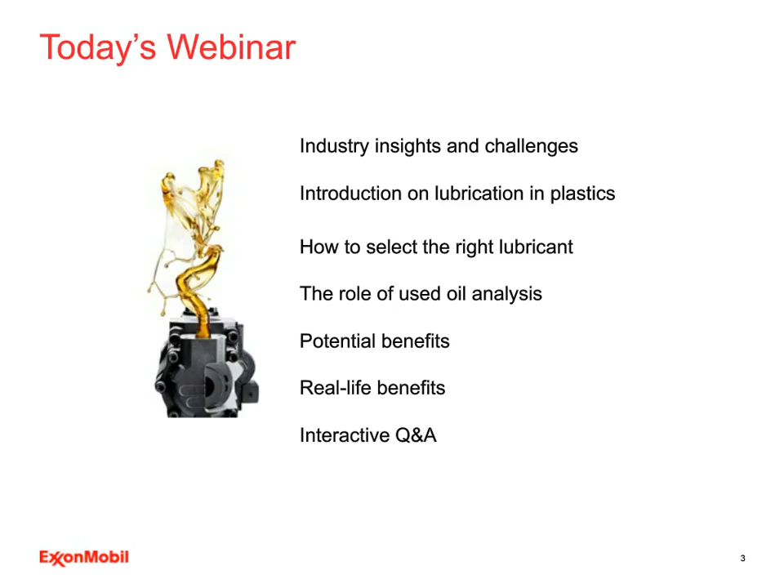So, Rakesh. Hello, everyone. Thanks, David, for that short introduction. So before we move on to the technical aspects of correct lubrication on a plastics plant, I'd like to highlight and put some scale to the plastics industry in Europe today.

So this is an industry that employs just over 1.45 million people today, with approximately 60,000 entities operating across the sector. And that's anything from polymer production to the processing of finished goods, all the way through to the distribution of those goods, the majority of which are small to medium-sized enterprises. With a 320 billion euro turnover, it's one of the largest manufacturing contributors in the EU region, and it's growing, in particular in the packaging subsector.

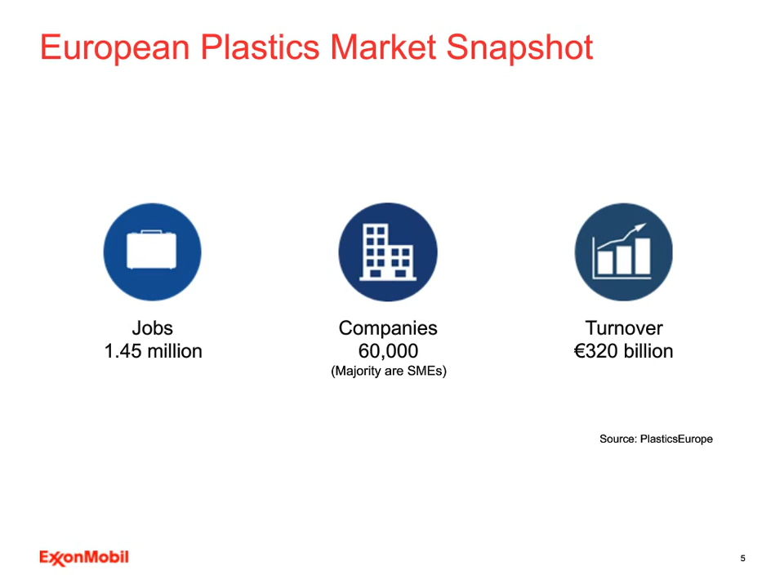So this is certainly an industry that we at Mobil are interested in today. When we were planning the webinar, what we wanted to do was first understand what the industry is challenged by today. And to do this, I thank our partner, Plastics News Europe, who have helped us to conduct an industry insight survey with a cross-section of plastics professionals who are involved in the manufacturing process of finished plastics goods.

The first question we asked our respondents: what's the most important factor when selecting new equipment? So 46% of our respondents told us that the latest technology was the most important factor when selecting their equipment. This was followed by 25% that selected equipment based on energy efficiency. For us, these are unsurprising results, as we know the industry is moving towards higher automation, wider machines, better designs, and we also appreciate that the latest technology and energy efficiency always do inherently go hand in hand.

And today we see newer plastics machines embracing that efficiency metric. We also see a lot of new machines that are coming fitted with newer energy measurement instrumentation as well as data loggers. So this is clearly an important area to look at.

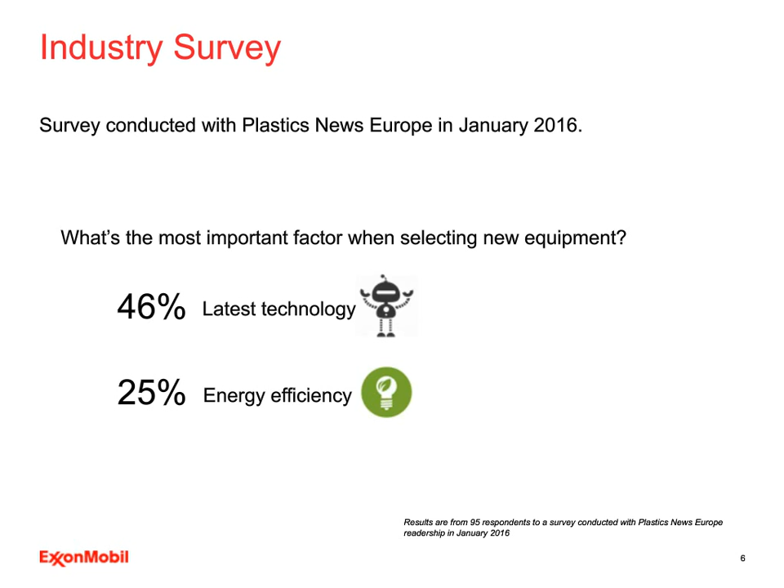When it came to lubricant selection, we asked these two questions together: what's the most important consideration when choosing a lubricant, and what is the most important benefit of using the right lubricant?

Half the respondents indicated that original equipment manufacturer approvals, as well as their recommendations, influence their choice. That's certainly something we appreciate in the lubricants business. ExxonMobil today has more than 6,000 approvals for our entire product slate, and our dedicated team of equipment builder engineers work very closely with the key plastics machine makers across the globe, right through from their design stage to development to the operational stage.

39% indicated price of the lubricant as an important factor. Price will always be an important factor, but alongside this result, it's worth mentioning that the same people indicated that 41% said productivity gains were the biggest benefit of choosing the right lubricant, closely followed by energy efficiency increases at 25%.

This tells us the industry is ultimately looking to lower their total cost of ownership around their equipment, and that can be anything from reducing filtration costs, improving cycle times and units produced, reducing filter and valve replacements, or even reducing the kilowatt-hour input into their pumps, and waste oil reduction. It's a very vast area, and it's great to see the industry is looking to lower that total cost of ownership.

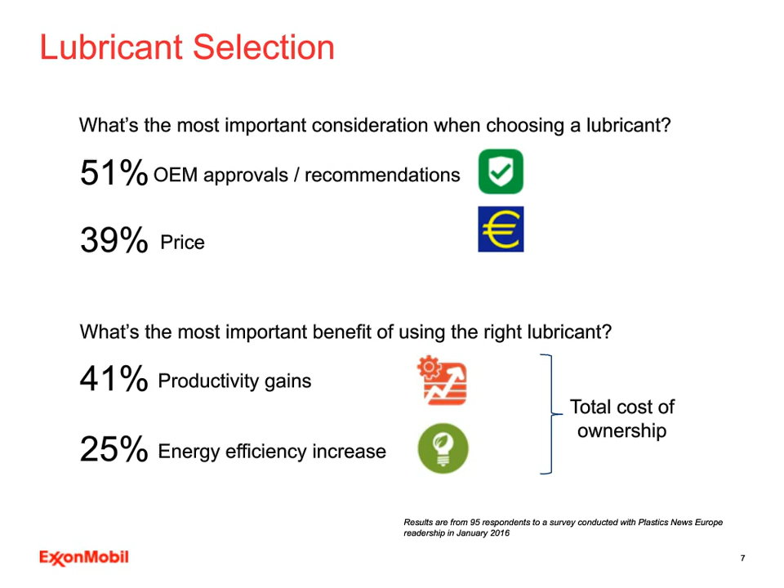For us, these are staggering results, and they really do act as the main premise behind the next section of this webinar, and hopefully we'll be able to address how proper lubrication can mitigate against these very costly pain points that plastics processors are experiencing today. So I'll pass you back to David, who would like to now throw a question out to the audience.

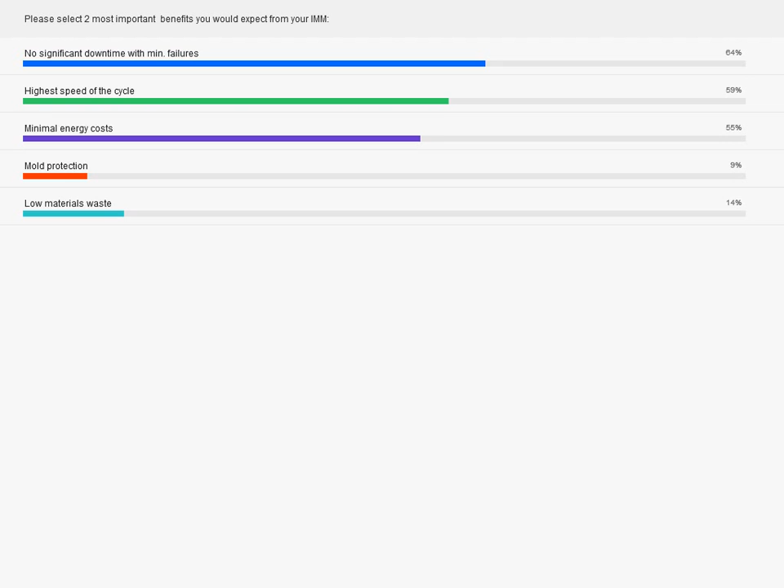Any comments from Rakesh or David specifically on that? That's very much in line with the opening statement that Rakesh made on the insights, that there's a lot of interest in productivity and also energy efficiency. So that's quite consistent, and hopefully we can talk about a couple of those issues as we go through.

Well, we have a comment on this next slide from Hans Ulrich Golz at one of the leading injection molding machinery manufacturers, Krauss-Maffei, which I'll just quickly read out: In our view, the key requirements of plastics processors in the implementation of the 4th Industrial Revolution are production efficiency, flexibility, automation, availability, and quality.

Rakesh, what do you think about Krauss-Maffei's view? Well, it's not surprising that Krauss-Maffei, a major OEM in Europe, takes this view, and they're absolutely right as well. Plastics processors do need to look at improving their efficiency, and they do that by achieving flexible production, increasing the availability and reliability of their equipment on site, and they need to do all of this whilst maintaining that quality of their finished good, with good consistency between finished good batches as well. These are all vital to remain competitive in today's market, so totally unsurprising to see Krauss-Maffei's opinion. I would add that these are also areas that proper plant lubrication can have a direct influence over.

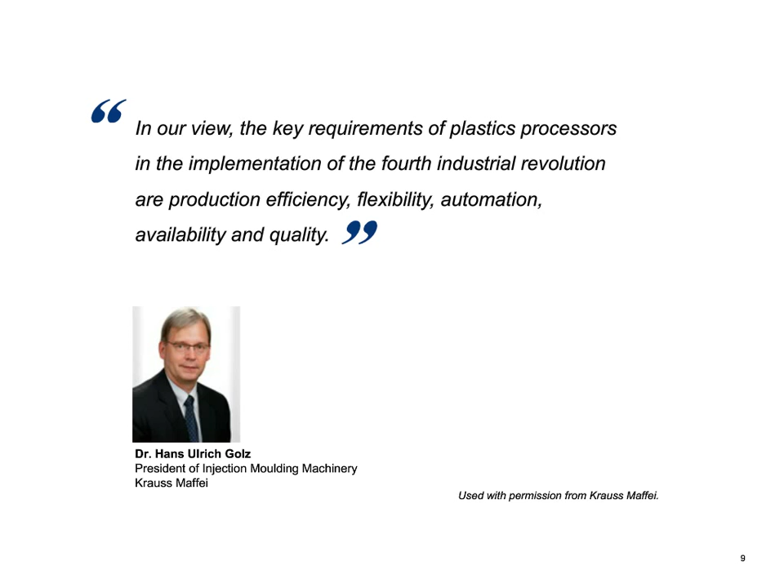If I can sum up some of the insights of the industry and the study that we've conducted, plastics processors are certainly challenged today, with 60,000 companies in Europe and growing competition coming from outside of Europe. Plastics processors have to look at new ways to survive and thrive in today's market.

There's certainly a huge variety of end products on the market today, anything from novel and innovative packaging designs to varying qualities and thicknesses of plastics. Processors are also having to keep up with increasing customer demands around shorter lead times, lower prices, while still maintaining that finished good quality. They have to look at increasing their flexibility around production and mold changeovers as well.

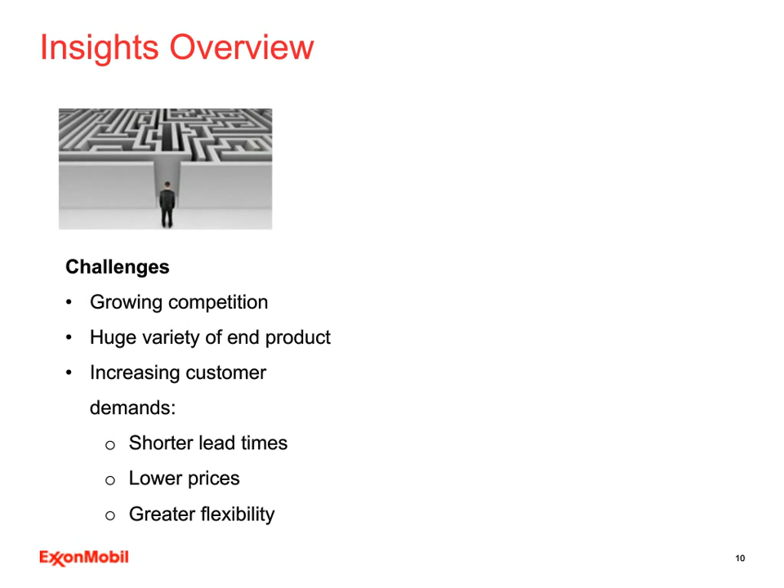We do believe these challenges can be met by many varying opportunities, and the key ones we're going to focus on today really relate to lubrication around the plant. We'll look at reducing maintenance costs, reducing waste oil, as well as optimizing the running of your equipment with a particular focus on achieving those productivity and energy-saving gains that we're hearing from the survey, and overall enhancing your plant safety.

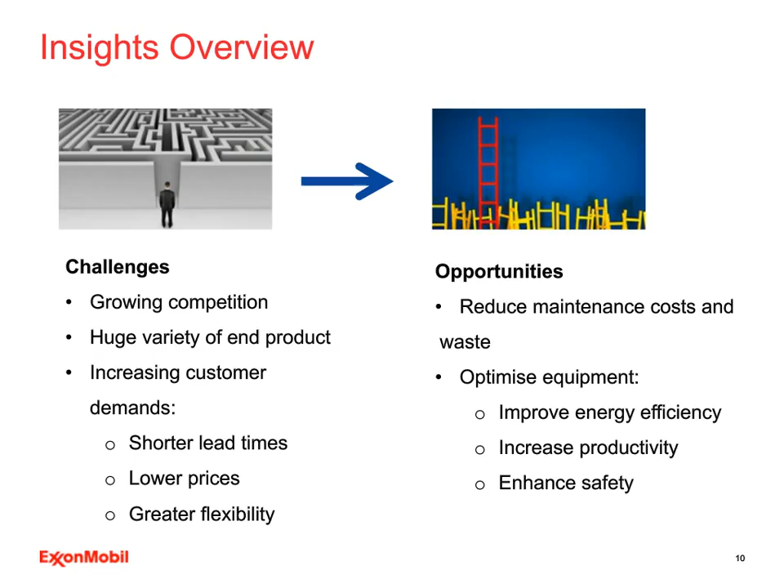So I'll hand you back over to David Adams, who will take you through some of the key considerations for selecting the right lubricant and the benefits it can bring to your operations and your bottom line. Thanks, Rakesh. Thank you very much.

I think I'll probably start with a disclaimer. There's obviously a very broad audience out there today, and this webinar is not designed to be a complete lubrication overview of the plastics industry. Based on the survey feedback, we've selected a few key areas of lubrication that relate to common pain points in your industry. So we've tried to keep the content fairly general in terms of different applications, so it's not all about hydraulic oils. And we've also tried to avoid this becoming a chemistry lesson.

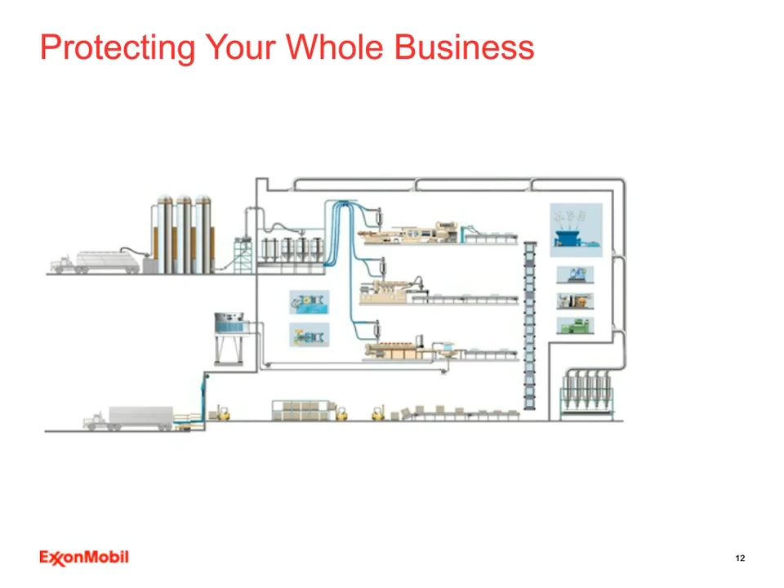This diagram provides a good overview of a plastic manufacturing plant. It shows the broad range of applications, all of which require specific types of lubricant. Throughout the whole manufacturing process, lubrication plays a really key role in keeping machines running, conveyors rolling, gearboxes and bearings turning. And as technology's advanced, equipment is designed to run faster and for longer between service intervals. And this often translates to higher loads, higher pressures, and higher operating temperatures, which in turn puts additional demands onto the lubricants.

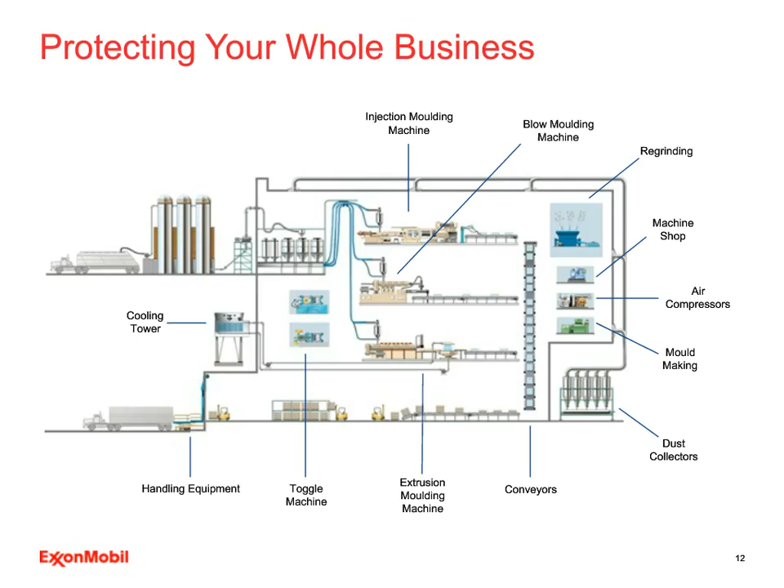But if those demands can be met, it's realistic to show how lubrication solutions can help deliver these kinds of benefits that are listed here. We hope to touch on a few key areas of lubricant selection that have been proven to help customers realize benefits in those areas listed, and we do have some examples later on in the deck. But I believe David wants to ask another question.

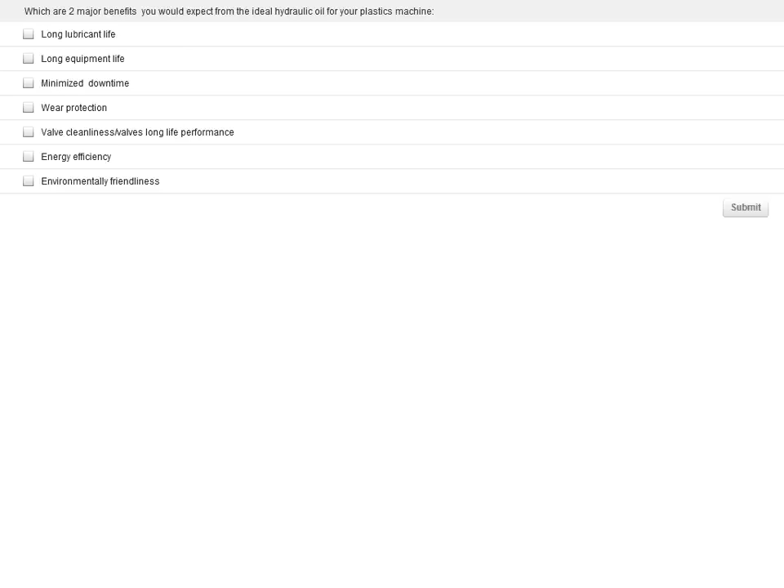Okay, let's see what responses we've got. Coming out on top is 44% of you saying long lubricant life, 40% saying long equipment life, 28% minimize downtime, 28% wear protection, and energy efficiency also 44%, quite high, and valve cleanliness and long life performance is 8%, and environmental friendliness 4%. Okay, I'm encouraged by that. Hopefully we can touch most of those points.

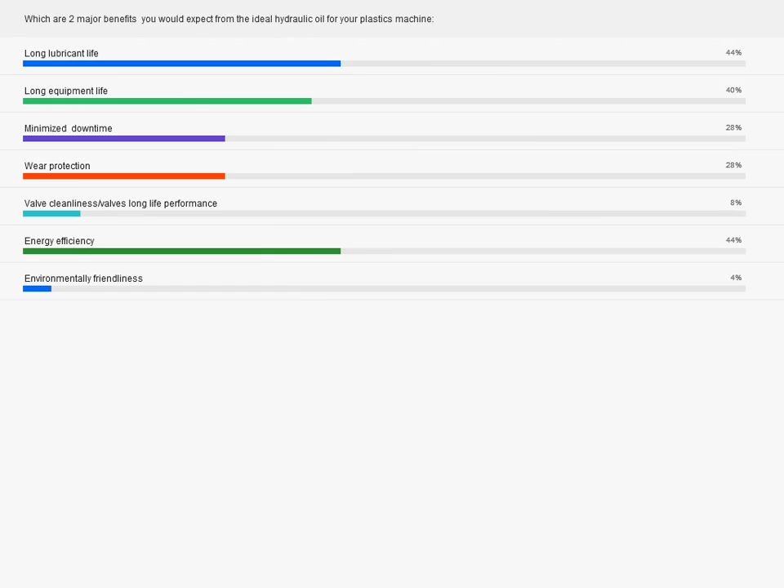It's not, as is sometimes the case, strong in a few key areas but at the expense of poor performance in another. And you also need a lubricant that's going to retain those characteristics throughout its service life. To achieve both high performance and longevity requires a balanced formulation using base oil and additive combinations that work really well together, and they stick together through the good times and the tough times. It is just like a marriage.

That's what we're referring to when we talk about a lubricant having a balanced formulation. The first lubricant property I'd like to cover is high viscosity index.

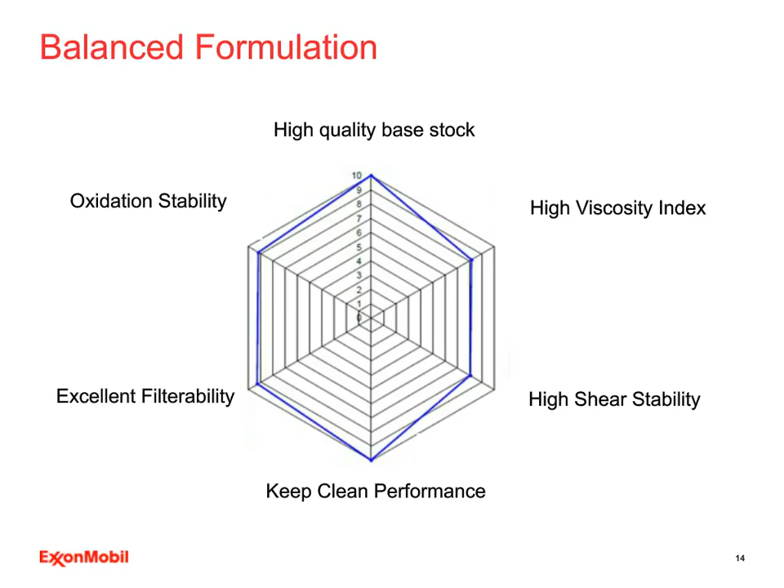Most machines and equipment today are designed to operate within a certain operating window, and temperature is just one parameter that can define that window. For example, a plastic injection molding machine is designed to operate around 50 degrees centigrade. Across different types of equipment, operating temperatures can vary enormously according to workload, production shifts, speeds, and the efficiency of the cooling systems on each piece of kit.

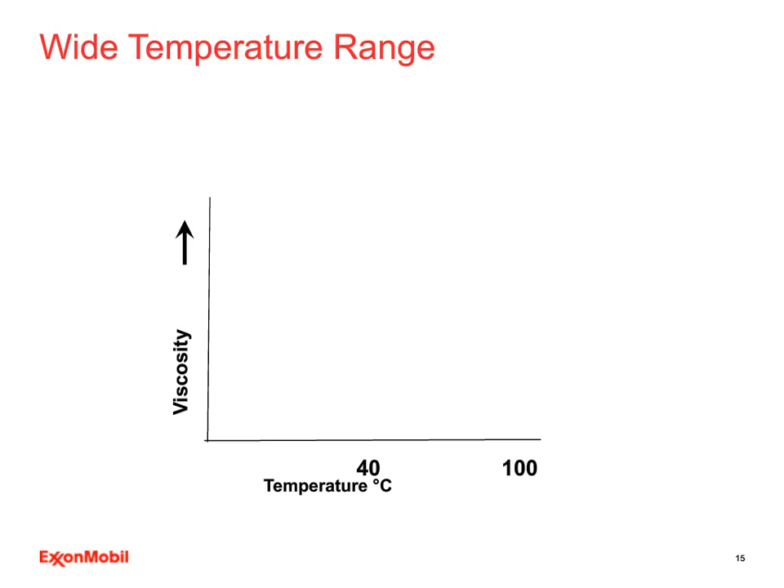If we consider the temperature range on the x-axis as a theoretical operating window, at the lower end the oil is cooler and the viscosity is higher. This makes it harder to move the oil, meaning more energy expended. At the upper end of the window, the temperature is higher and the viscosity is lower. We know from lubrication theory that a reduction in viscosity leads to a reduction in film thickness, and at some point this results in wear, where you have metal-to-metal contact.

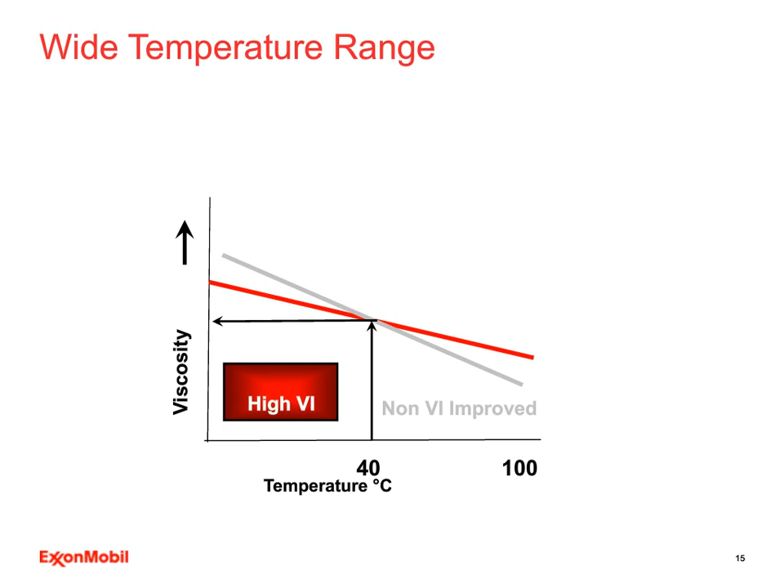Now if we compare this oil with one that has the same viscosity grade but a higher viscosity index, over the same operating window the oil is less viscous at the lower end and more viscous at the upper end, and the gradient is less. So the benefits of choosing a lubricant with a high viscosity index are increased wear protection and improved pumpability, which has a positive impact on maintenance costs and energy consumption.

The next area is high pressure operation. We've just covered the virtues of using a lubricant with a high viscosity index, and you'd certainly want the oil to retain this property throughout its service life.

The oil in a hydraulic system is subjected to such high compression and shear stresses that with some hydraulic oils, the viscosity index improver additives are susceptible to shear. The result is that viscosity drops, which is a form of degradation. If you checked the viscosity index of an oil at the beginning and at the end of its service life and compared the two, it would give you an indication of its shear stability.

So in choosing a lubricant with a high viscosity index, it's just as important that it is shear stable. This is achieved by developing the right combination of a high-quality base oil and additive.

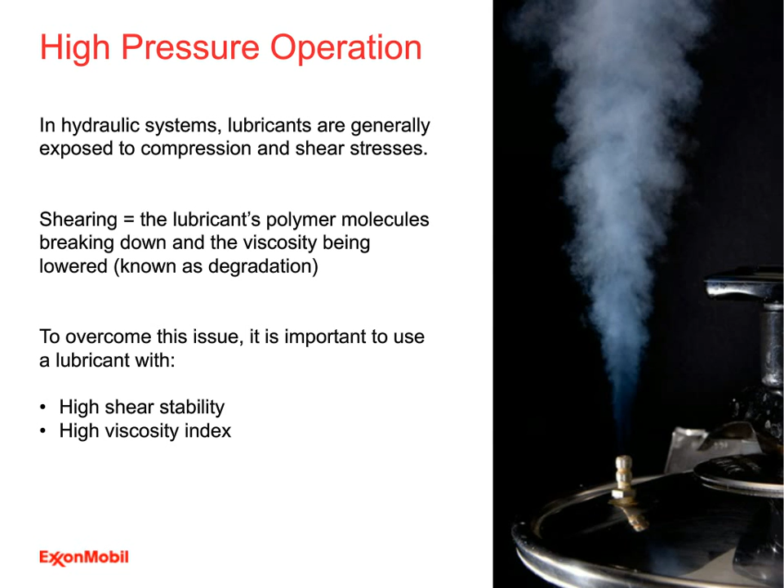The next area: 44% of our survey respondents reported issues with component or equipment wear, so this is very topical. If we're working with a customer who's reported wear issues, the first and foremost consideration for controlling wear is to choose a lubricant with the correct viscosity for that equipment's operating window. It's the first thing we would check in an application.

However, there are times when metal-to-metal contact does occur, and so the second line of defense, if you like, is a surface-acting anti-wear additive. There are essentially two different types: those that contain zinc and those that don't.

The zinc-containing additives work well and have been used for a good number of years, but under severe operating conditions they've been linked to the formation of sludge, which in a hydraulic system is not a welcomed guest. A zinc-free anti-wear additive can provide the same level of protection but is less susceptible to sludge formation. So our recommendation is that if you're experiencing sludge formation issues using a zinc-containing additive, you should consider the zinc-free option.

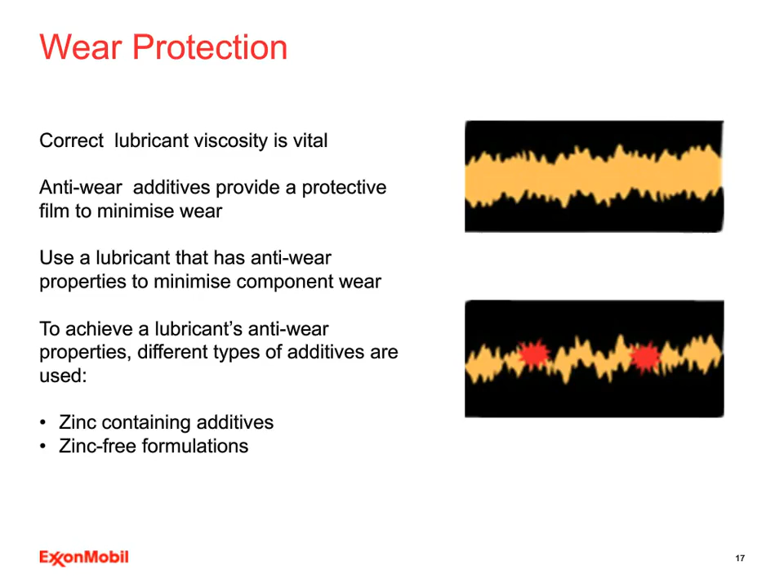The next aspect is oxidation control. It's an unavoidable fact that lubricants oxidize over time. The rate of oxidation depends on several factors, temperature being the main one.

If the oil doesn't have good oxidation resistance, you may see symptoms such as filter plugging or varnish formation. Again, it's the right combination of a high-quality base oil that has a natural resistance to oxidation and the use of an antioxidant additive that gives you an oil with good oxidation resistance, protecting your equipment over extended oil life.

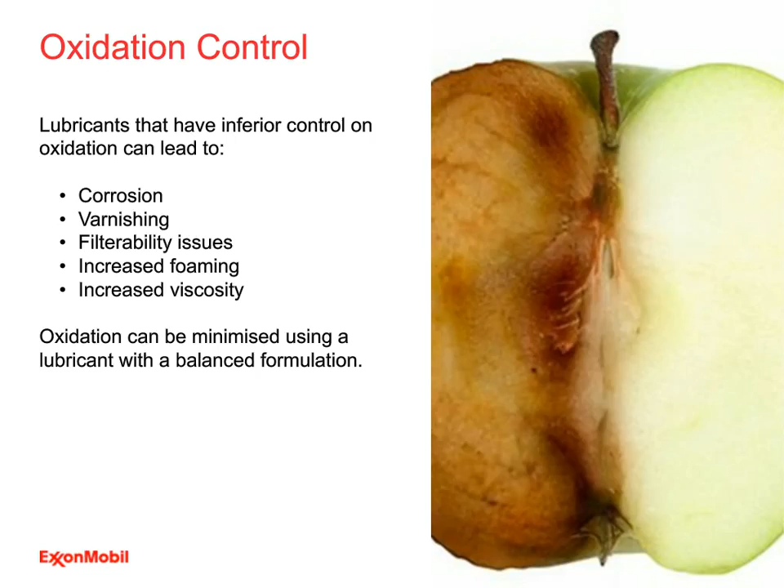Okay, this will be our last snapshot poll that I'm asking our audience to take part in. This one's a little bit different in that we're asking you to come up with an estimate, and that is what percentage you consider of all failures in injection moulding are caused by hydraulic oil contamination. So this is just a quick guess, or maybe educated guess if you think you know. Just click one of those percentages and press submit, and we'll see what the responses are.

Okay, so the most popular answer is 60% from 39% of you, then 40% from 32% of you, then we have 80% from 16% of you, and 20% from 12.5% of you.

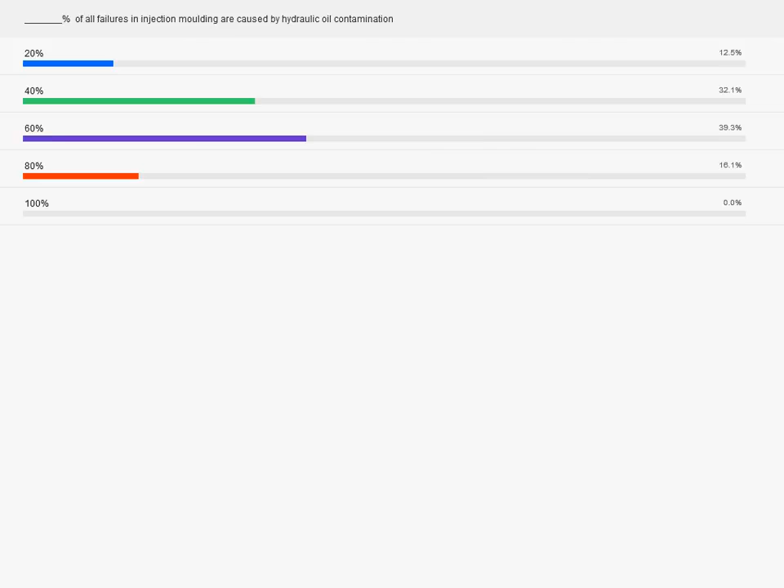Okay, well when the American Plastics Council did a survey on this question, they found that actually 80% of all failures in injection moulding are caused by hydraulic oil contamination. David, does that sound right to you?

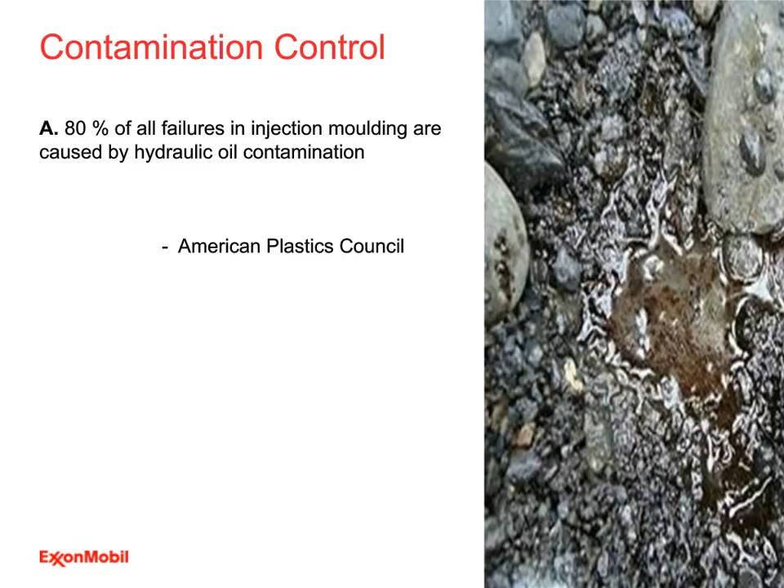Well, you're all pretty close. There's a high recognition of the effect that contamination can have on a lube oil system. Contaminants in a lube oil system, unfortunately, are almost unavoidable. You typically get dust, you get water, there's processed materials coming from outside the system, and you also have wear debris and contaminants generated from within the system.

Like oxidation, contaminants compromise the life of the oil. And also like oxidation, it triggers many other ways that the oil degrades, which ultimately leads to equipment failure. So it's really, really important to be able to remove those contaminants easily.

And this is the job of the filters. The oil can either make this easy or difficult, and an oil with good filterability allows the oil to easily pass through fine filtration mesh, and at the same time give up the contaminants that have been held in suspension. It's stating the obvious, but it's good to choose an oil that has good filterability. And if you are experiencing short filter life, you could consider a lubricant that offers better filterability.

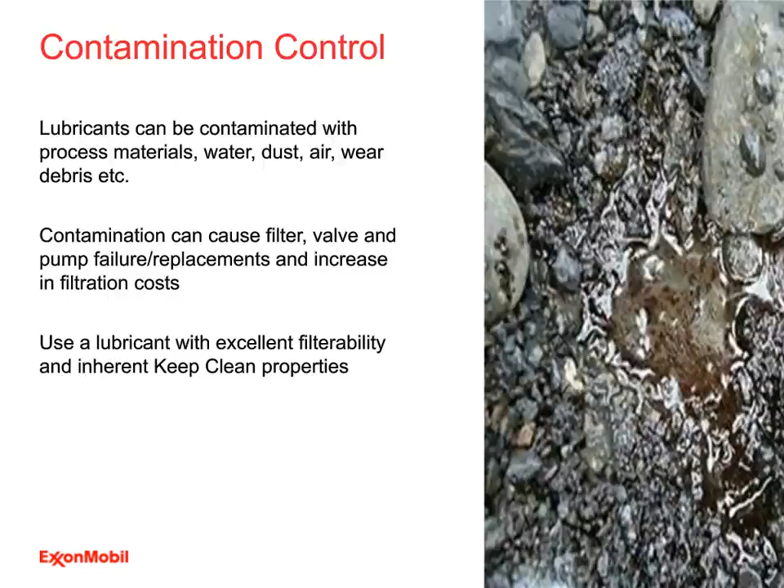So we've covered the concept of having a balanced formulation that delivers good performance in a number of areas, and this is achieved through the right combination of a high-quality base oil and additive pack. I'm going to hand over to Rakesh, who's going to take you through a few of the product ranges that exemplify these characteristics we've just covered. Okay, thanks, David.

So you've heard from David what to look out for when selecting the right lubricant and why. We've heard that if you are experiencing some of the issues he's mentioned, there are areas you could consider when selecting a better lubricant. We've talked about that balanced formulation, temperature performance, wear protection, oxidation and contamination control. They're all very important parameters to look out for.

I'd like to take a moment to highlight to the audience some of the products that ExxonMobil leads this industry with, to meet some of the challenges that plastics processors face today.

So the first product is Mobil DTE 10 Excel. This is our leading hydraulic oil. It's a product with a high viscosity index, and it's been proven to help achieve up to 3.6% energy efficiency savings compared to an equivalent standard mineral oil. It has ultra keep clean performance, which helps control oxidation and contamination. All of these can have a direct effect on oil change intervals and on filter and valve replacement costs. They can help reduce machine downtime, as well as reduce the number of pump failures you have.

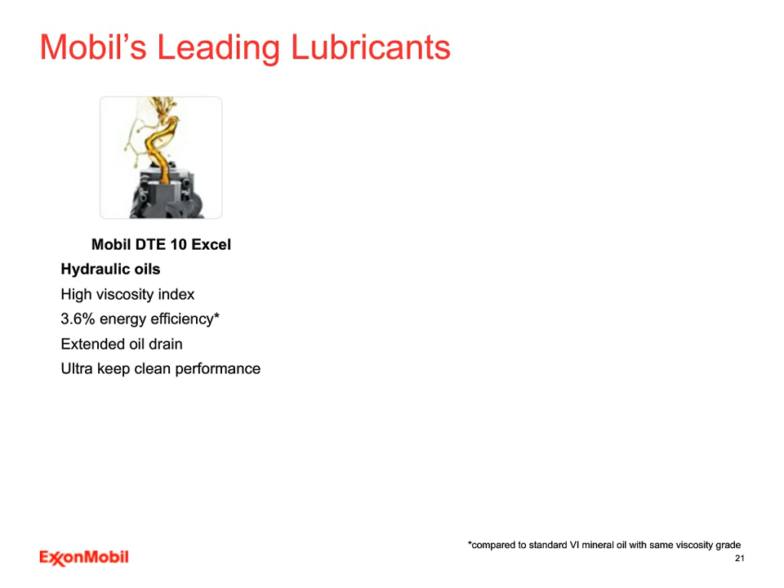Mobil SHC Rarus is our product for air compressors. This is an oil we have seen last three times as long versus the leading competitive synthetic compressor oil today. This really does help reduce your oil change intervals and waste oil, and it's a product with that wide temperature performance range.

Finally, Mobil SHC 600 circulating oil. Again, that wide temperature performance range that we have. It's a product that has fantastic wear protection, in particular for highly loaded bearings and gears.

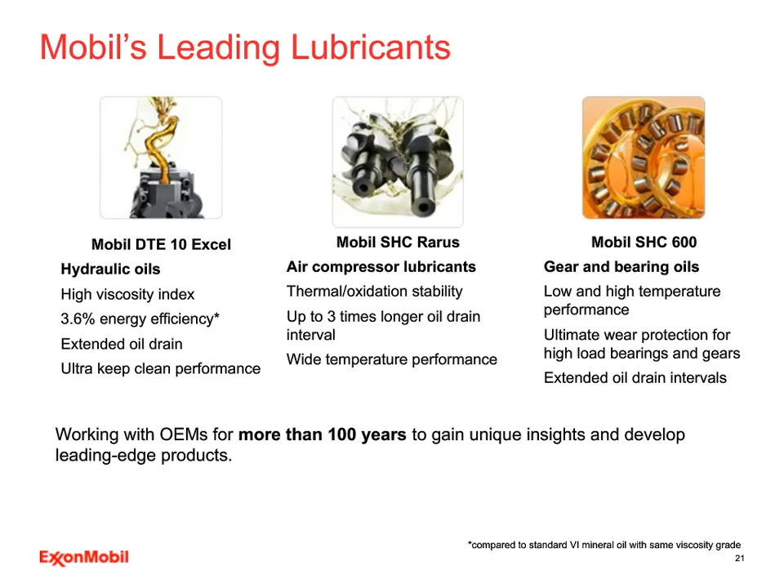Something that really underpins our products in the plastic sector is that key relationship with OEMs. This is a relationship that's lasted over 100 years, and it's something we leverage and demonstrate value with to our customers to solve some of their key lubrication challenges.

So we've covered off a few areas, things that you should look for in your lubricants used on site. But as we know, it's not all about the lubricants. I'll pass you back to David now, and he's going to demonstrate some of the other areas that you should discuss and actively search for when you talk to your suppliers today.

Thanks, Rakesh. As a leading lubricant supplier, we don't just supply products. We work closely together with our customers to understand their business and operational needs, and we leverage all the available technical resources and services to develop cost-saving lubricant solutions. The 4 areas shown on technical support, for example, Rakesh has already referred to the long-standing history that we have with our equipment builder network, and that's just one area of technical support we can tap into.

We have a very strong field engineering services team across Europe, and the engineers in those teams work exclusively on customer projects, looking at developing lubrication solutions, helping them to improve productivity and reduce their maintenance costs. And they work very closely with our trained sales representatives.

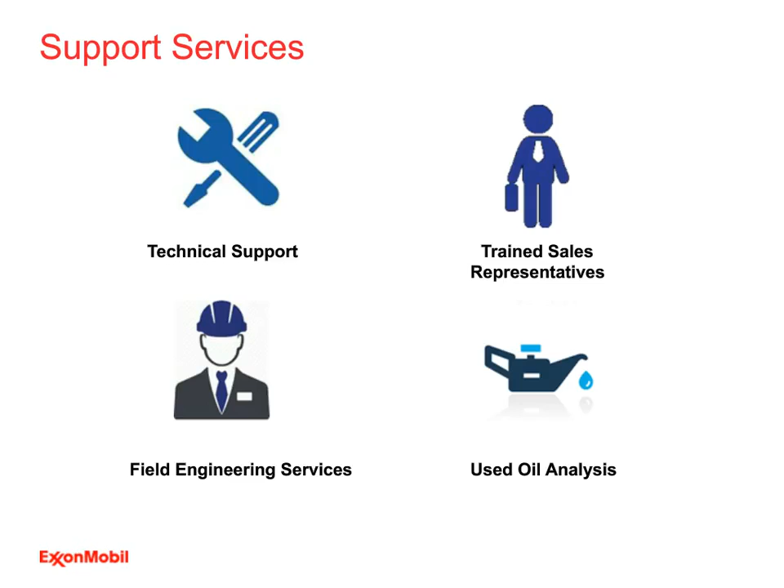And the last aspect, the 4th aspect shown, is that if we're talking about a lubrication solution, it's difficult to avoid the subject of oil analysis because it is so important. So we'll talk a little bit about used oil analysis.

We have to treat lube oil as the lifeblood of your equipment. And by analyzing the oil at various intervals, it's possible to get a health check on the condition of the oil and also of the machine.

We can pick up gradual changes that occur over time, and it provides really useful insights into what is happening inside your equipment. It supports a predictive maintenance program, and it helps you to get the most out of your oil, which I think was one of the things that came up in the surveys.

It's certainly worth putting into place a condition monitoring program for your critical equipment. So my advice is don't wait for something to go wrong, because it will when you least expect it. Give yourself the benefit of foresight and put in place a condition monitoring program for your critical equipment. Protect your business with Signum.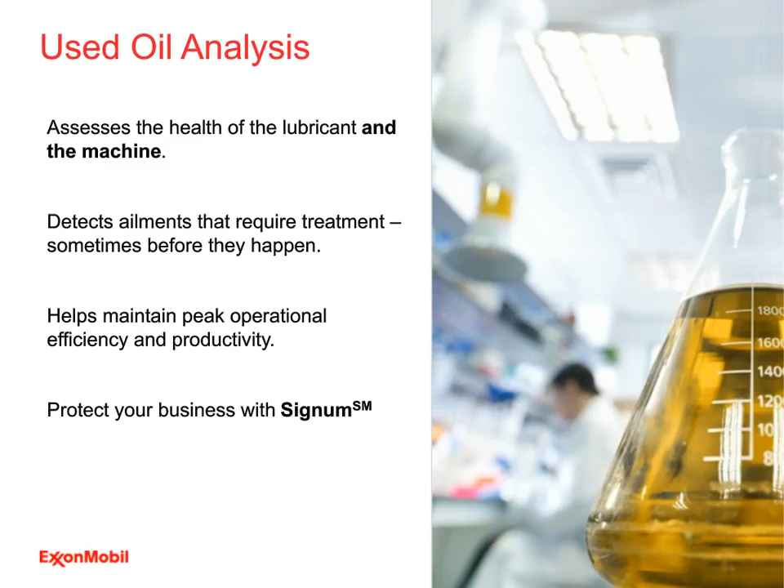Okay, so we're now looking at the real-life benefits with some specific case studies. Everything we've mentioned so far has been really around the potential and theoretical benefits of good lubrication. So what I'd like to do now is take you through some examples of where our products have succeeded in the real world to meet some of these challenges.

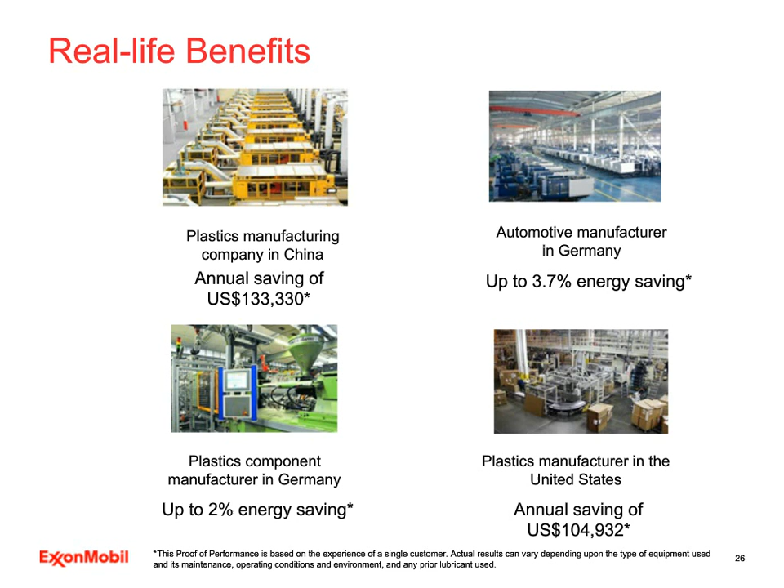So, in China, we have helped a major plastics component manufacturer on their PVC calendar machines. We used our Mobil SHC 636 product, which is part of the Mobil SHC 600 series I talked about earlier. This really helped achieve up to 4 times longer oil drain interval versus their previous oil in use. The customer also experienced a relatively large increase in the availability of their machines, lowered maintenance costs, lowered filtration and oil disposal costs, and all of this equated to an annual saving of over $130,000 per annum. This is verified by the customer and a great result that we were able to help them achieve.

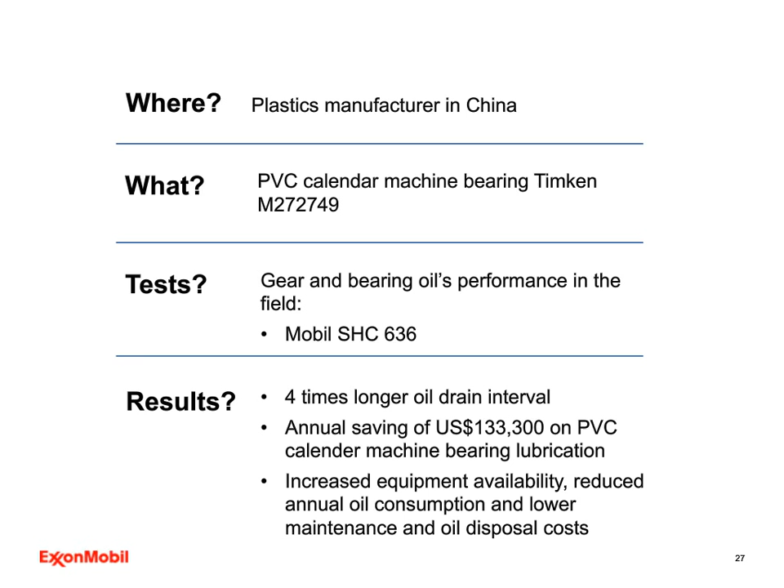The second example is with Volkswagen Audi. A plant they have in Germany uses 22 injection molding machines, a mixture of Krauss Maffei as well as other OEMs. We were able to demonstrate an energy saving between their previously used oil, the HLP-D 46 ISO-VG grade hydraulic oil, versus our Mobil DTE 10 Excel. This energy saving equated to a 3.7% annual saving, the equivalent of 330,000 kilowatt hours per annum saved on electricity input to that plant.

They also saw an extension in their oil drain intervals and an increase in their system service life. These are 2 areas that have been highlighted through not only the survey but the live polls we've had today as well. Again, another great result where we were able to help our customers achieve their business goals.

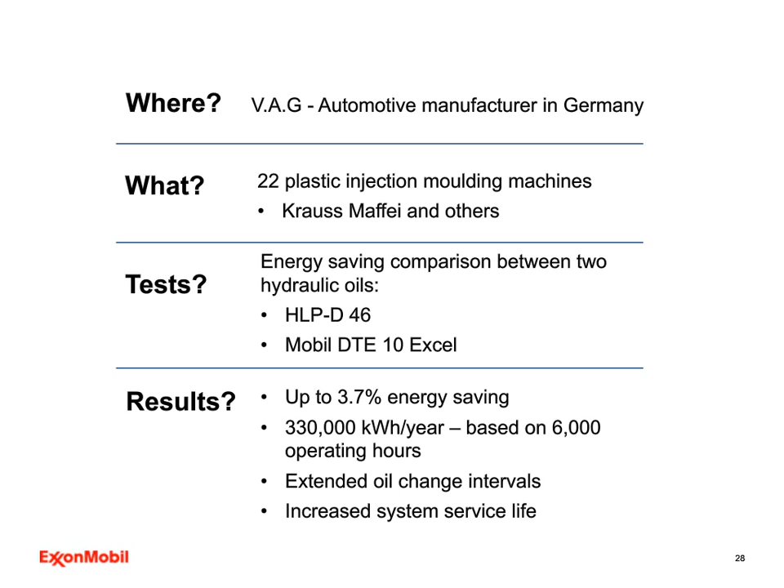An example now where we've really achieved success with our solutions and products. Hafner and Krullmann, a major company based in Germany, specialize in plastic spools, and they currently have more than 50 injection molding machines in operation on this one site, varying in size between 50 to 2,000 tons. The company is one of Europe's largest manufacturers of plastic spools, ranging from special spools for silver stripes used in €100 notes to spools produced under clean room conditions for medical equipment and applications.

This company has realized the importance of hydraulic oils in maximizing the productivity of its equipment for a number of years, and was keen to see what performance benefits could be realized through the introduction of Mobil DTE 10 Excel. Following a successful test phase with 2 machines, the company decided to convert additional machines to Mobil DTE 10 Excel. Since then, 5 of the company's installations globally have been filled with it, and other machines use it for top-up purposes until they have a complete refill.

Following the initial introduction and monitoring of Mobil DTE 10 Excel, Hafner and Krullmann stated they can extend their oil drain intervals from 40,000 to 60,000 operating hours, making an energy saving of up to 2% on average across their machine portfolio. This company also expects to double their filter life, which in itself would deliver significant cost savings. These are results that the customer is verifying and telling us.

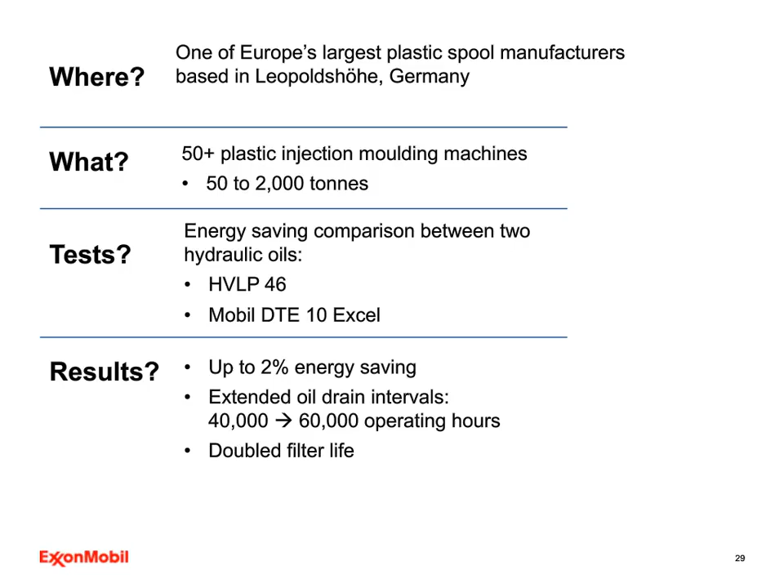The last example I'd like to share with the audience is around our premium range of greases that have helped a plastics manufacturer in the US in their Husky injection molders. Using Mobil SHC Polyrex 005 grease, a polyurea-based grease, we were able to achieve a 200% increase in the life of their tie bar shoes.

This customer has documented this saving to be worth over $100,000 per annum. They also anticipate they will see an increase in equipment availability, reduced oil consumption, and lowered maintenance and oil disposal costs. These advantages also come about because they'll have less human interaction, less maintenance engineering interaction with their machinery and the oil, and therefore this also delivers some safety benefits to the site.

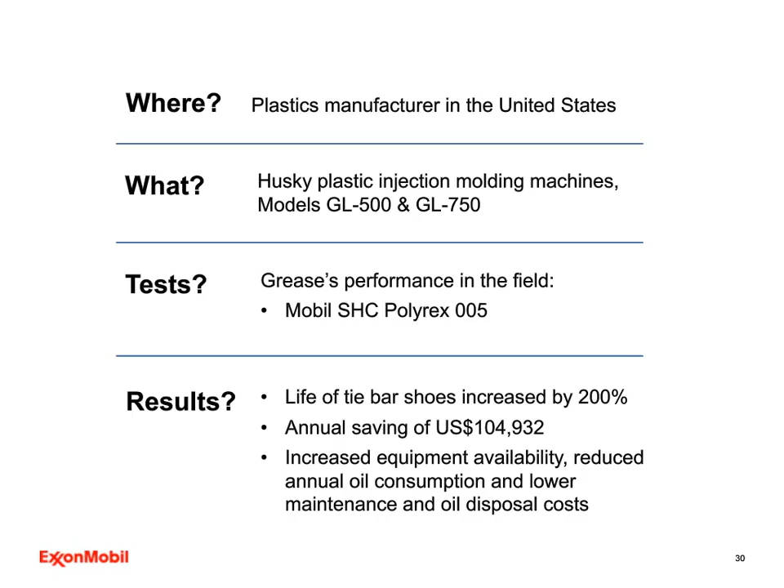It's worth mentioning that we have many more examples and an extensive library where we've been able to help our customers with our solutions to meet some of their challenges.